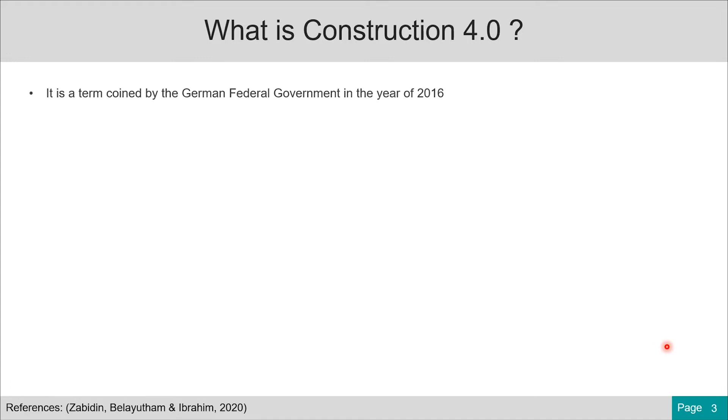Let us start with what is Construction 4.0. It is a term coined by the German federal government in 2016, an adaptation of the idea from the manufacturing industry known as Industry 4.0. The construction industry itself governs almost 13% of the global GDP, and 7% of the world's working age population work in construction.

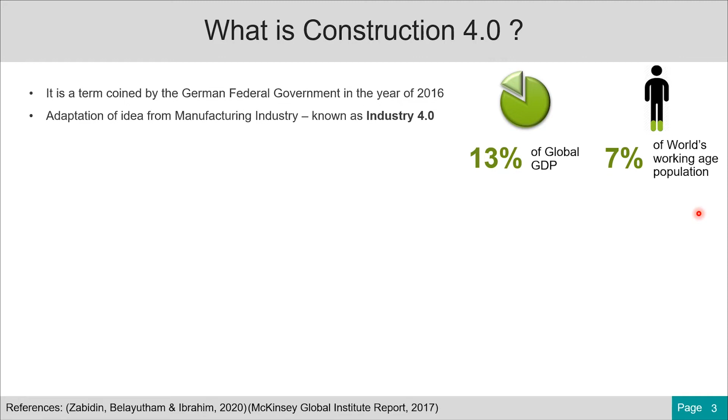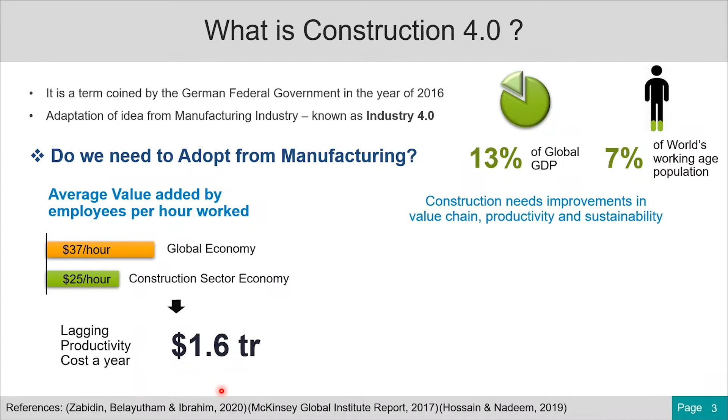Now you may start thinking, why do you need to adopt from manufacturing? If we look into the average value added by employees per hour, for the global economy it's around $37 per hour, whereas for the construction sector it's around $25 per hour. Adding that together, the lagging productivity cost a year is almost 1.6 trillion. So construction needs improvement in its value chain, productivity, and sustainability.

If we compare construction and manufacturing, we see the waste part is almost 57%, value adding activities is 10%, and supporting is 33%. Whereas in manufacturing it's quite the contradictory. That is why we start to focus and adapt something from manufacturing.

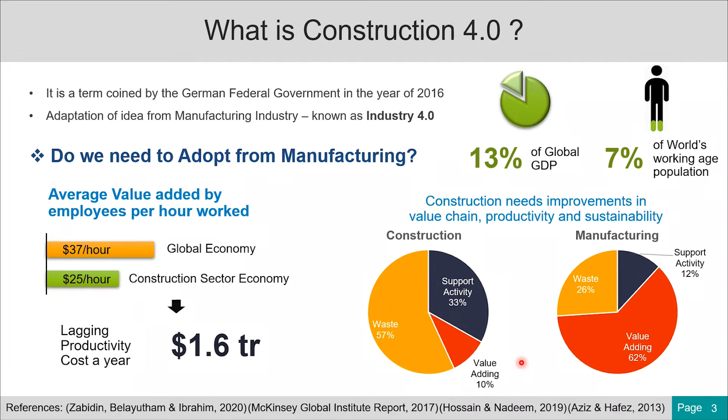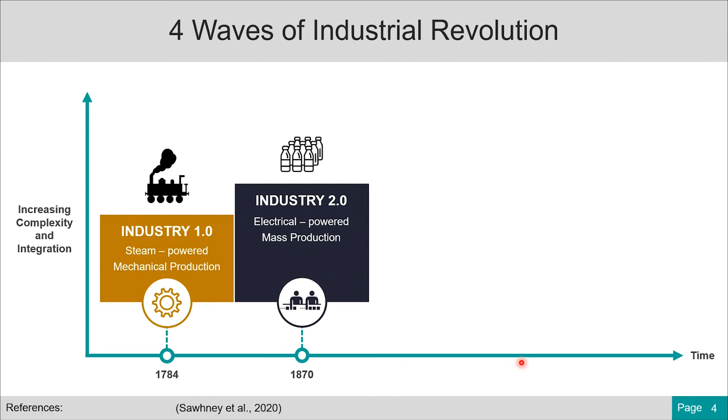This manufacturing revolution went in four waves. It started with the first industrial revolution, Industry 1.0, with steam powered mechanical production. Then with electrical powered mass production came Industry 2.0. Then Industry 3.0, which changed in the 1970s with assembly lines, automation, computers and electronics.

Finally today we are in the generation of Industry 4.0, where we talk about cyber physical systems, Internet of Things or networks, digital technologies, where equipment are connected among each other with seamless data transfer. However, it's already working in Japan - they are thinking about Industry 5.0, which is more human-centric design than machine-centric design.

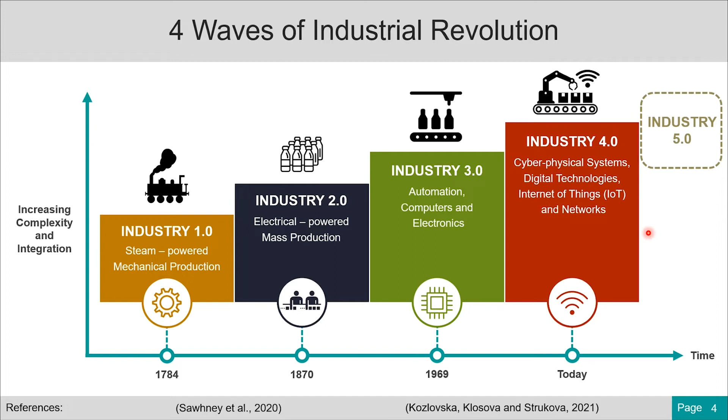But where are we from a construction industry perspective? We are not totally even in Construction 4.0. So why does the construction industry lag behind? Because we think the construction industry is a highly fragmented industry.

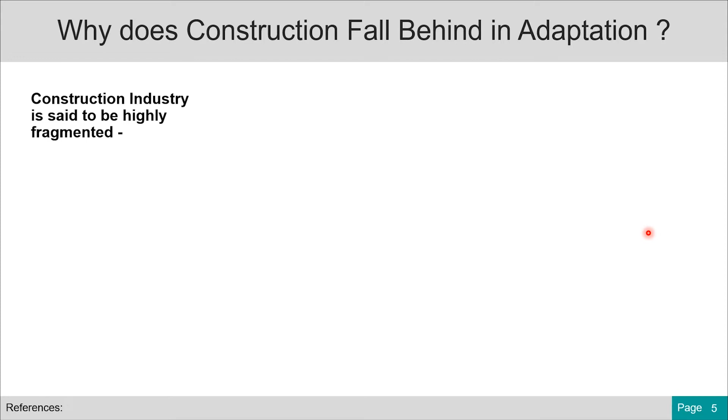Similarly, there can be different stakeholders in your project like owner, designer, engineer, contractor. All of them have a different motive and a different target to achieve. So the communication and integration between the stakeholders becomes very difficult.

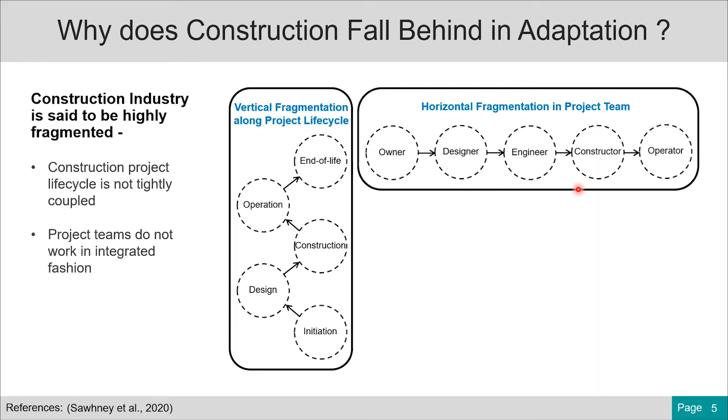Finally there comes the longitudinal fragmentation. We always say construction projects are unique - it cannot imitate manufacturing because every project has a unique design and its own timeline. So if we cannot replicate between projects, it becomes very difficult. But is it so? Is there no pattern available? That is what we're going to talk about.

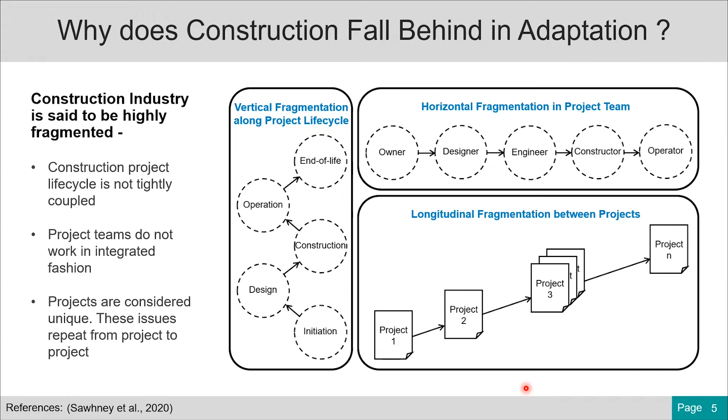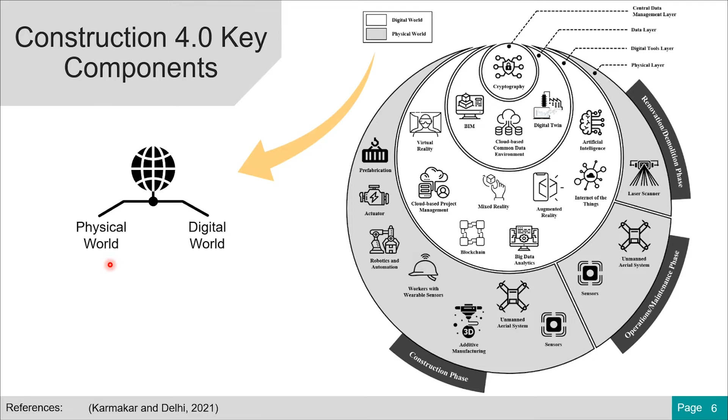Let us start with, when we talk about Construction 4.0, what are its key components. If this is the construction world view, we divide it into two parts: one is the physical world, another is the digital world. In the physical world it's when the human interacts with machines, and in the digital world the data is transferred through the digital tools layer to the data layer, and finally we have a central data management layer.

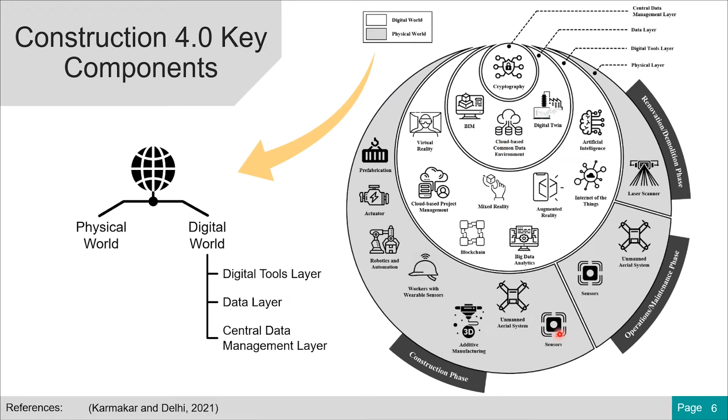Now what's important to understand is the flow of information in the project lifecycle. Let us divide the project lifecycle here into four phases: design and documentation, construction and execution, operation and maintenance, and renovation or demolition.

At the design documentation phase, we go for 3D models. We can do simulations, energy analysis that helps optimize our design, and here we can start thinking about generative design. Looking at the designer's previous designs and patterns, the system can start predicting what the design should be, aiding the designer in decision making.

So from here, we start looking at the influence of artificial intelligence and machine learning in construction.

In the reverse way, when a design is complete, we can have this 3D model going for our permits and contracts. We can use and analyze this 3D model and get our permits ready. But now we are not doing it. We will discuss more on this later.

Moving to the next phase, in construction or execution phase, we can have an nth dimension building information model, where this 3D model gets integrated with sustainability, cost, time. There is cloud-based project management.

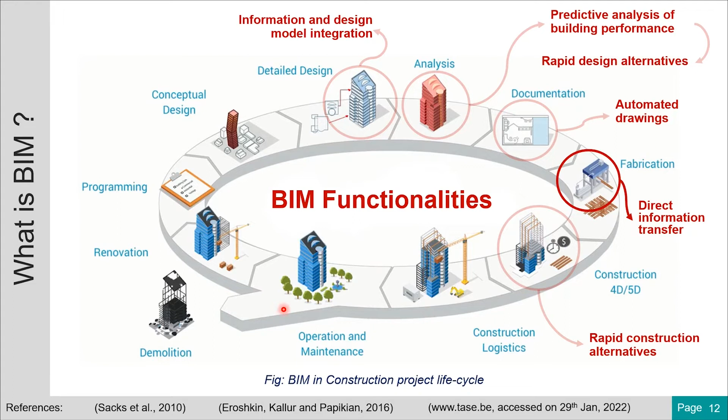One thing still missing in this image is collaborative coordination. As there are multiple stakeholders in construction, the integration between them is most important.

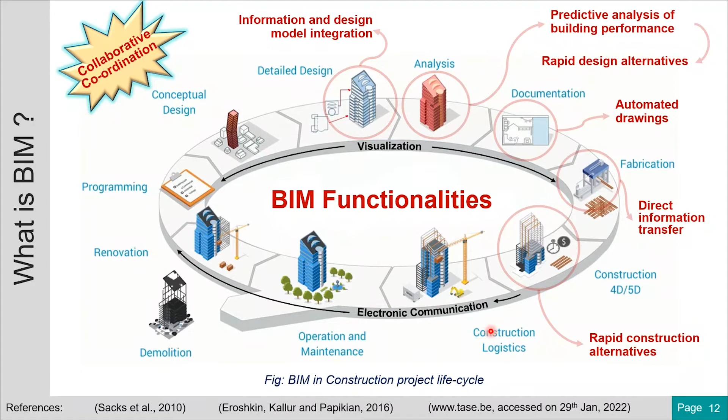So clash detection - there can be cases at the site that are non-reversible where there is material waste. To reduce waste, why not simulate those clashes, identify the problems and what design changes are required at the clash detection stage, identify them earlier and go to the site. That kind of reduces your waste as well.

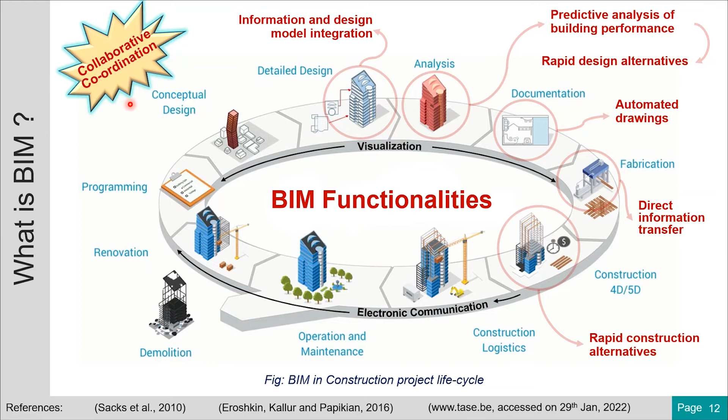Now after BIM, I talked about automated compliance checking or permit compliance. So why do you need that?

As per researchers, generally in many countries, the local authorities are doing that checking manually. And now with the increase in number of different codes and in the complexity of the code, it is becoming very difficult because this process is error prone, and also it is time consuming or causes delay in the project.

With time, we have a new technology or data structure coming - that's Industry Foundation Classes - that made the BIM environment's collaborative information exchange easier. So in that way, we are going towards this because the technology now supports us.

Now, in India, we need more than 75 different permits. Can you imagine the potential impact on time? So let us take an example.

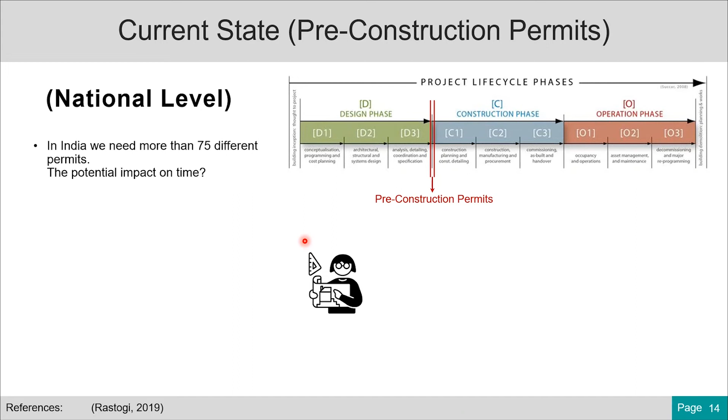We have an architect who creates a design, then sends his 2D drawings to the municipality for checking. Now, somehow it goes around 7-8 tables for different permits and it gets rejected. It comes back to the architect. She iterates over all the drawings because they are 2D drawings.

They don't have any connection among each other. She works on it. It takes time. She resends it to the municipality. Well, this time it may get accepted. So what can be the total time consumption? That is why it's more required to move towards automatic codal compliance.

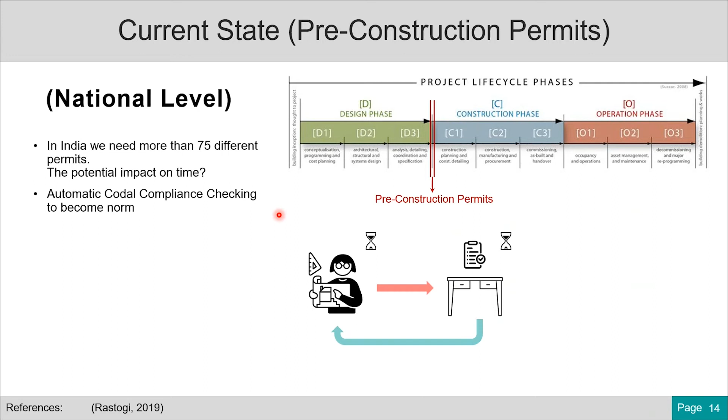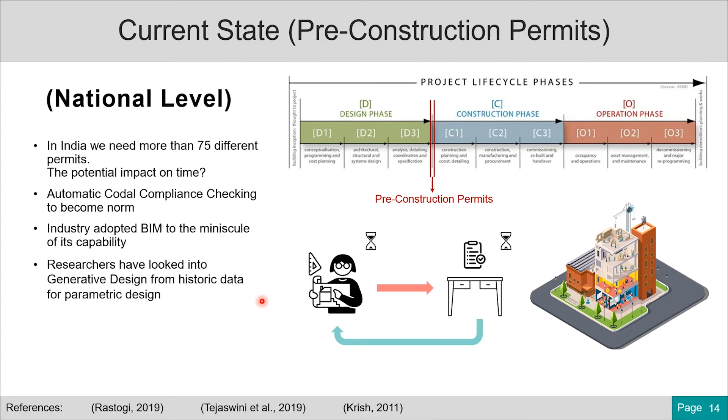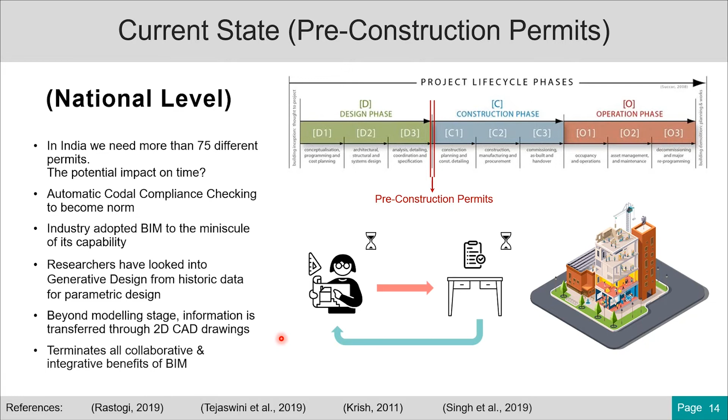Now, when we look at BIM, the industry is actually using BIM to its minuscule capability, mainly at the design phase, where generative design to some extent is used for parametric design. But beyond that design stage, the information is transferred to 2D drawings, and that 2D drawing terminates all collaborative and integrative benefits of BIM.

There can be different compliance checking approaches.

They need it because different types of data can be there. Data can be pre-processed, there can be missing data. How do I handle all those things? For that, there can be different approaches.

One can be a plugin application. Second can be an object-oriented approach, that is BIM currently at this stage. We can have a logical approach, or we can have clauses, and natural language processing can look at those clauses and find out numerical clauses where rule-based application can be directly done. And there can be performance-based clauses where you probably need machine learning to look at it, or it might need human interventions. They cannot be directly automated.

Now let's classify the complexity of rules. There can be 4 classes. I'm skipping 1 and 2 because they're quite simple to understand. So class 3, let's say it requires an extended data structure.

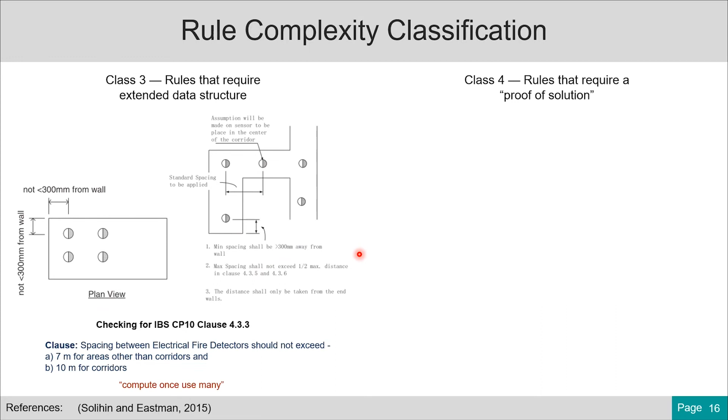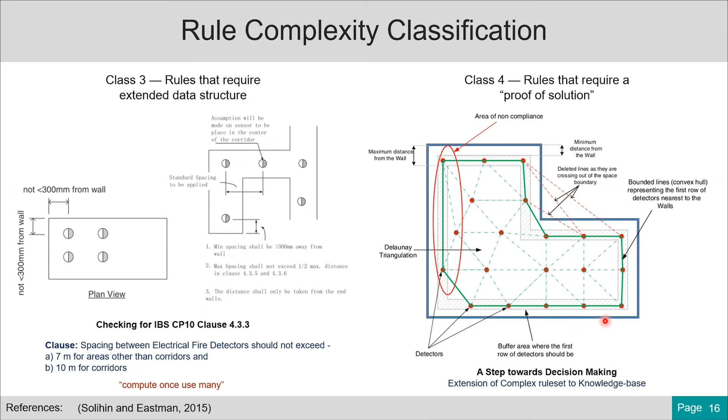In this kind of situation, we can go for a knowledge-based solution. A knowledge-based solution means you look at the previous data, and the system itself, rather than checking what the designer has created, can look at the previous data or pattern of design of the user, and predict these locations. It can help in the decision making of the user, create a layout such that it doesn't fail, and confirm it from the user itself. So that helps us towards decision making.

Now, talking about decision making, we come to artificial intelligence. By definition, artificial intelligence is the automation of activities that we associate with human thinking, activities such as decision making, problem solving, and learning.

Now, we talked about BIM doing many things throughout its life cycle. It seems like a very intelligent thing to work with. But is it really intelligent? That's a doubt. Let's take a couple of examples.

Let's say there is a staircase or a balcony railing that has been missing — the designer forgot to put that. There can be cases where it's required and it is not required, but it will fail when it goes for compliance checking. Before going to that, can the system help the user identify that this can be a potential problem when you go for compliance checking? That saves a lot of time, and saves the model from going to the municipality, coming back, and all that stuff.

Similarly, the relationship between column and beams: the beam understands, okay, when I move a column, the beam should increase in length. But does it understand if I move the column 50 meters, it's not even possible? It doesn't — it understands to some extent, but after that, it doesn't process it. So we can say it's an ignorant process. Can we make it aware?

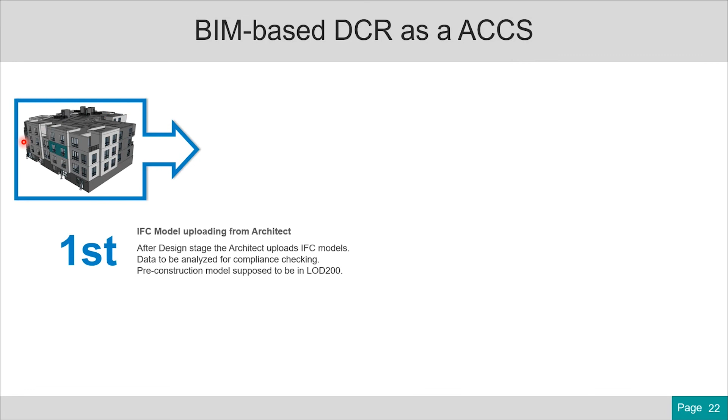Now, just to give an overall idea of how BIM-based development control rules work as an automated compliance checking system: if we have a 3D model like IFC, it's uploaded from the architect. It looks at the missing data required for automated compliance checking. It uses a hybrid approach, mixing and matching rule-based and ML-based approaches to find out what data is required, and after that we get the results of automated compliance checking.

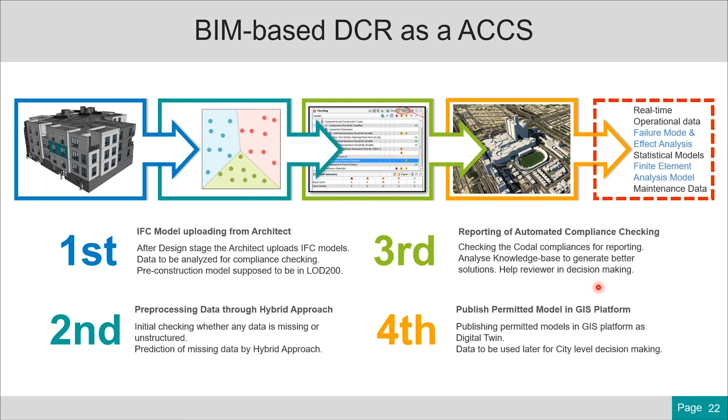Here also we can use rule-based or machine learning, as in the spectrum I showed you. After that, the data is updated in a GIS-based platform, which is kind of going towards a digital twin. Once we have the digital twin with all the compliance data and codal data, we can do real-time operational analysis, failure mode and effect analysis, statistical modeling, all this calculation. Suppose there is a flood coming—how to evacuate, which city portion to be evacuated—all this helps us in real-time operation management.

Now, moving a bit outside my PhD topic: there are different applications of ML in object classification in construction as well. One example I was giving—this is a point cloud data, kind of an image made of different points.

From that, we have to make a 3D model for structural integrity or to add a new portion in the structure. So here ML can apply. Rather than a modeler creating everything, going to sections, going to different drawings and understanding whether it is a beam, a column, what can be there inside a ceiling, the computer can look at the pattern of their shapes and predict what should be there, whether it's a beam or column, and how it should be placed. So it eases the process.

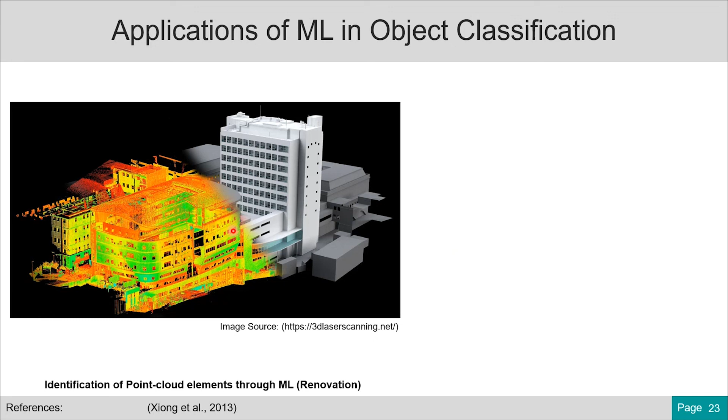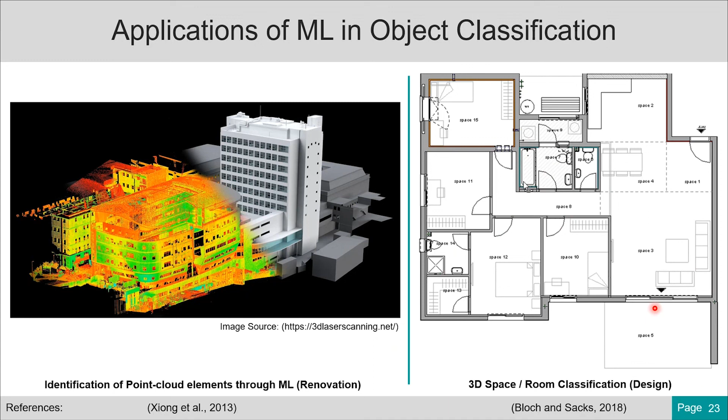Similarly, you can have a building floor with 300 rooms, and you have to identify the corridor, as I mentioned earlier. So can I look into the pattern of these rooms, what equipment is there, whether doors are swinging in or out, and predict this is a living room, this is a bathroom, this is a kitchen, and understand whether it's inside or outside. We can calculate the FSI, and all that becomes easy.

Similarly, it's not only about code compliance for a site, it can be safety compliance as well. Computer vision helps us understand whether the workers at site are wearing personal protective equipment and working safely. And there can be RFID based solutions, as I've mentioned.

You have a virtual reality model where we know the potential risks at sites. A worker with a wearable sensor, when he goes near a risk and doesn't have proper equipment, the safety manager looking at the monitor can understand this is going to be a problem, and this RFID based system can give a warning signal to the user. These predictive safety measures help us save lives as well.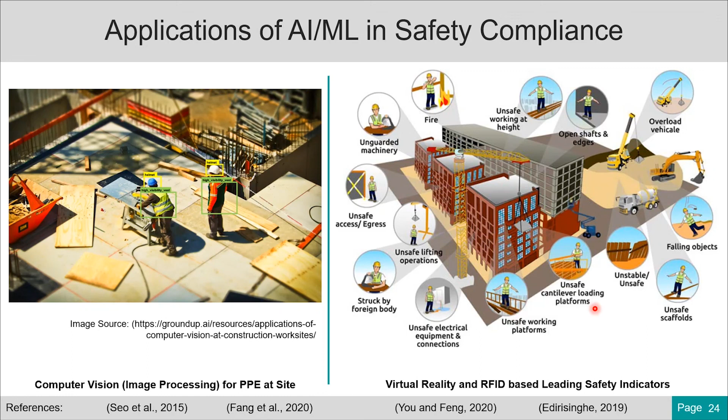But as the professor also discussed, there are many potential challenges in moving into this. First, there isn't much standardization. Only one code is there, ISO 19650, but that's only one piece of the puzzle. Then if proper training isn't given, the harmony will not be maintained.

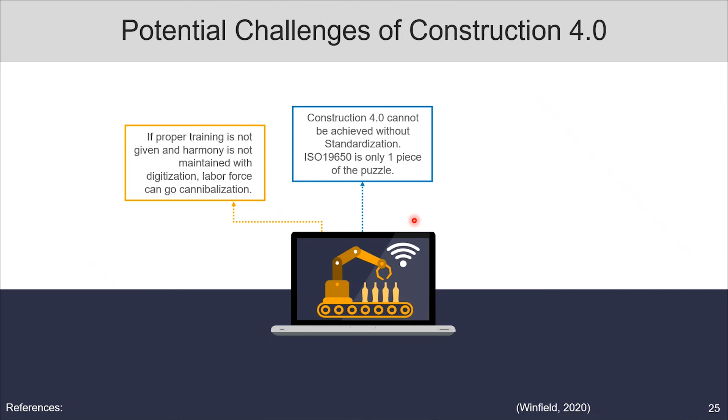So you bring in more equipment and improve digitization, but if the labor force is getting removed, they will start revolting and the problem is there. So you have to train them as well. And again, there is high investment cost and high potential impact on society. Also, as there are multiple stakeholders involved, IPD is kind of inevitable. Without integrated project delivery, it's not possible.

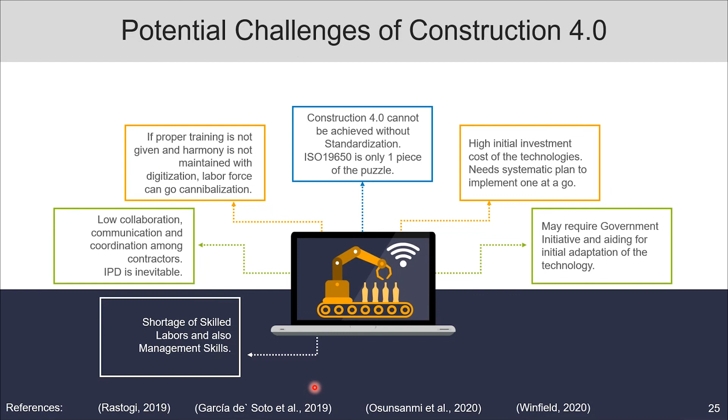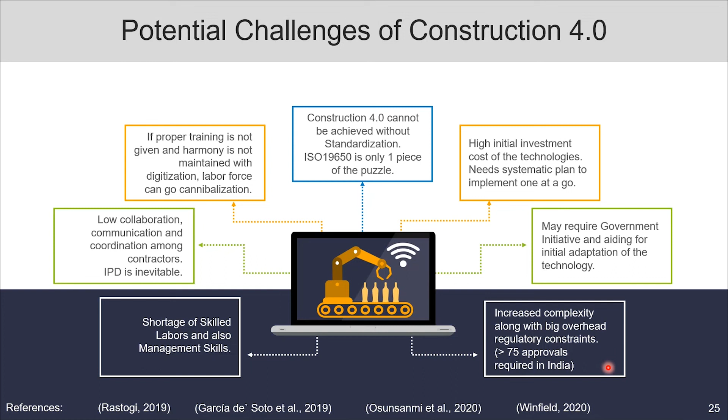It may require government initiative and aid to adopt these technologies. Finally, there will be a shortage of proper management skills or labor, because here you need more skilled labor than normal. And finally, as I said earlier, there can be 75 different approvals required in India, which increases the complexity.

So finally, in a nutshell, if I want to talk about the whole process: construction 4.0 is at its infancy, but it's quite an interesting area of research because it talks about interaction between the technologies and how to move forward. The study also shows, in a project life cycle, what different tools can get integrated, so it can help stakeholders understand which technology they can adopt faster and which is easy to adopt to move forward, reducing time and improving productivity.

We looked at some BIM-based development control rules in automated compliance checking, and how that can help. And finally, especially in these kinds of things, it's better to have a hybrid approach than only an ML-based approach, because of accountability and other such concerns. With that, I would like to conclude, and thanks.